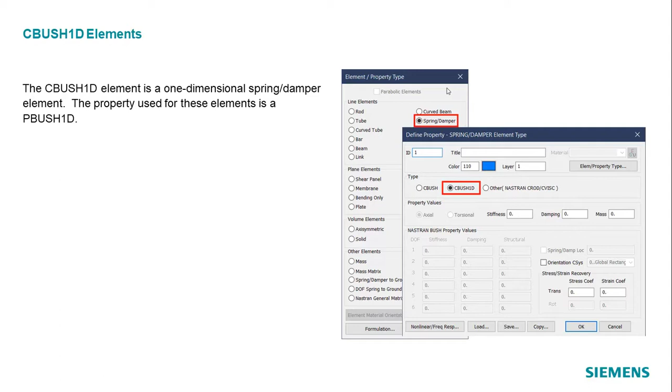With the release of Femap version 2021.2, Femap extends its support for Nastran with the creation and editing of CBUSH1D spring and damper elements. The CBUSH1D element is a one-dimensional spring damper element. The property used for these elements is a PBUSH1D.

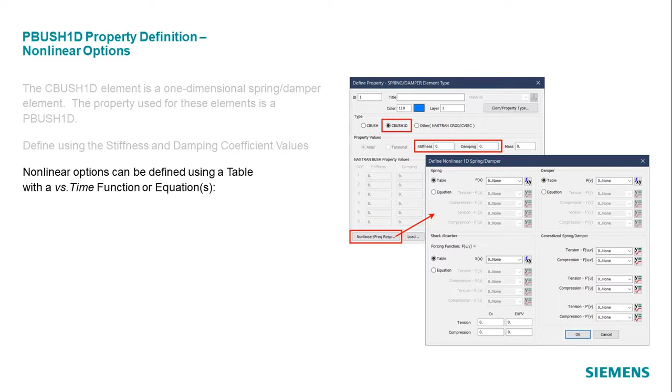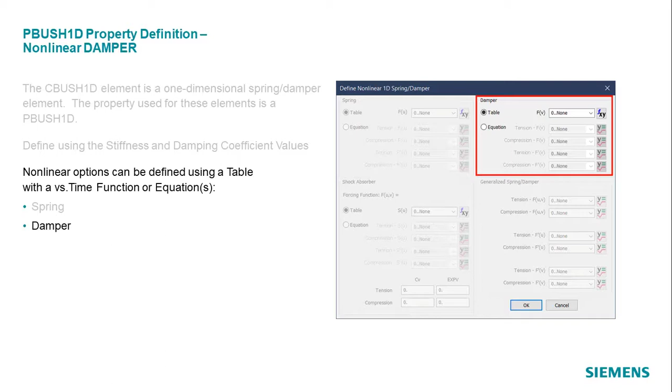You define this property using stiffness and damping coefficient values. Nonlinear spring dampers can be defined using a table with a versus time function or with equations. These options define a nonlinear spring, damper, shock absorber, or a generalized spring damper.

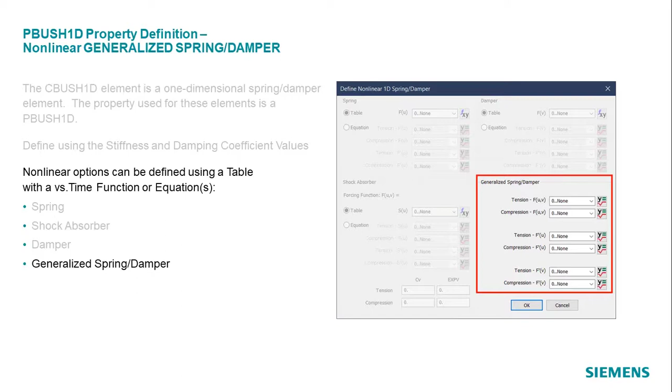A CBUSH1D element x-axis orientation is defined by the direction from the start and end nodes. For a CBUSH1D element, equations can be used to define nonlinear force and damping behaviors. You create and edit these equations using the design equation simulation entity. This creates a Nastran DEQATN card.

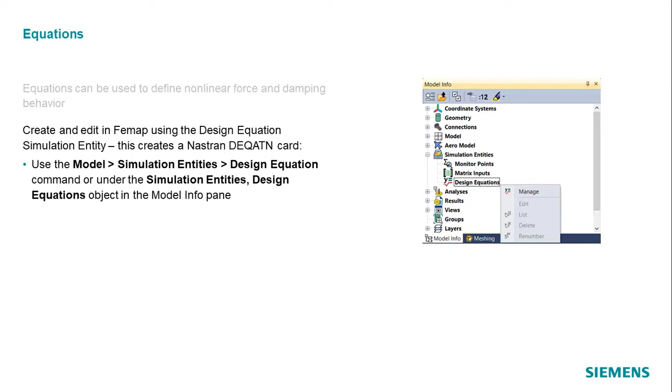To create design equations, use the Model, Simulation Entities, Design Equation command, or in the Model Info pane, right-click the Simulation Entities Design Equation object. Clicking the new Design Equation icon displays a formatted equation for the equation type selected in the Define Nonlinear 1D

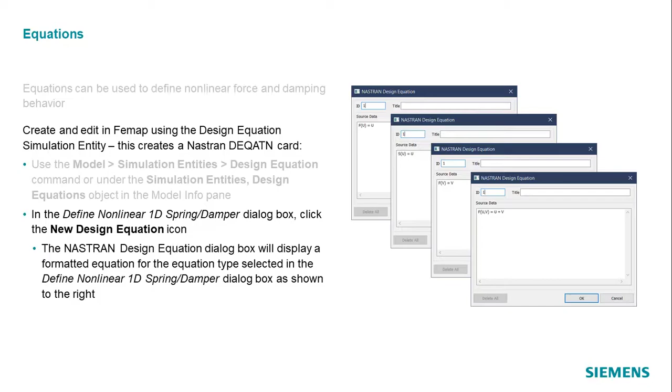Spring Damper dialog box. In this example, we have two one-dimensional spring damper elements that are loaded in compression and tension using Simcenter Nastran's multi-step nonlinear solution 401 transient analysis. The first 1D element is a linear spring damper with a stiffness of 10,000 pounds force per inch and a 0.02 damping coefficient.

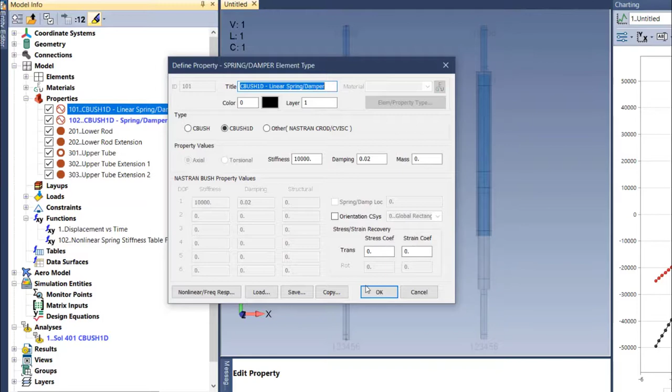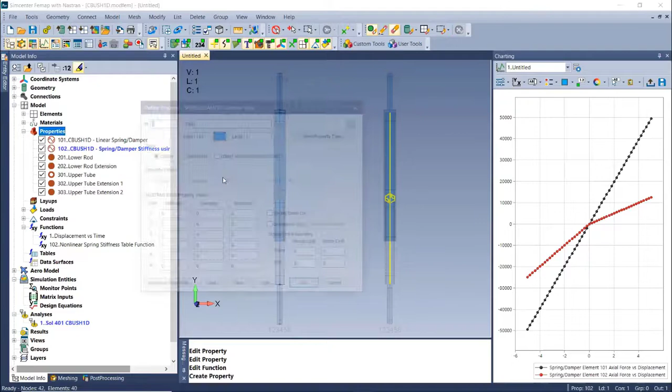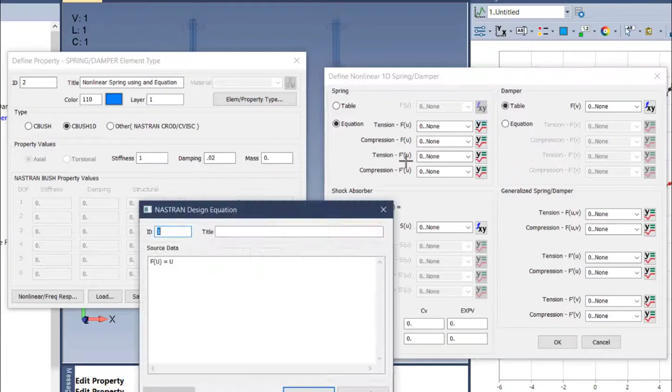Finally, to create a one-dimensional nonlinear spring using an equation, create or edit a new one-dimensional spring damper property, click the Nonlinear button, select the type of nonlinear spring damper, set the type to equation, and then click the new Design Equation icon. This opens the new Design Equation dialog box where you enter the equation. Equations then can be edited using the Equation Editor command or in the Model Info pane.

To conclude, this enhancement to Femap increases productivity for those models that use one-dimensional springs and dampers by eliminating the need to manually edit a Nastran deck.